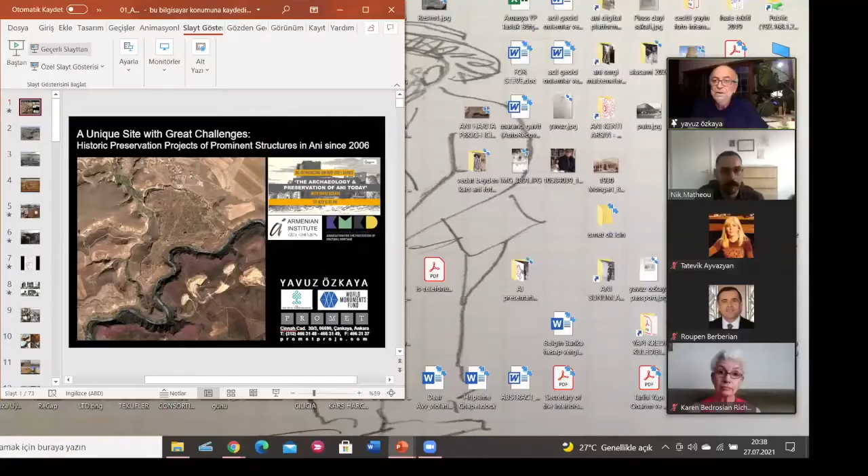Okay, thank you very much, Nick, and the Armenian Institute for this great initiative, starting a long-term planning and opening up space for future collaboration centered around Ani by the scholars, experts, organizations, and individuals from different geographies, different countries. And thank you everyone who are following this series of talks and contributing to the current research presented by dear Nick, Christina, and Hegner, and for being here today while I'll be presenting historic preservation efforts in Ani for the past 15 years now.

It's a pleasure for me to share a summary of these projects and my personal journey in Ani. I will briefly introduce the site and the first preservation projects from 2006 to 2008, managed by the Ministry of Culture and Tourism. Then I will focus on two current projects at Ani, which are being realized through a collaboration between the Ministry of Culture and Tourism and the World Monuments Fund since 2011. In the last part of my presentation, I will take you to a not well-known side of our work on Ani, namely the emerging research, collaborations, alongside the friendships that flourished between experts, parallel to preservation efforts in Ani, and mainly initiated and supported by Osman Kavala.

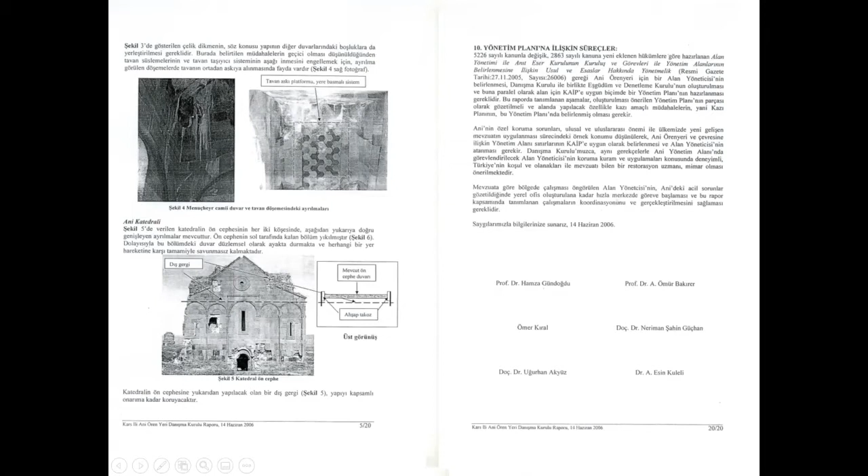The projects I am presenting today are being discussed with the board, including the findings, proposals, and all details of interventions before implementations. In 2008, I continued with two other significant monuments, the Church of the Redeemer, or Surp Prkich Church, and the Church of St. Gregory, or Abughamrents. The tender included the investigation and analysis of the problems, mostly structural, of the Baron's Palace, or Sarai, resulting from extreme walling up during the 1999 reconstruction.

These are among the handful of monuments at Ani that still have most of their original features intact, including their walls, ceilings, floor, and roof tiles, all of which nonetheless are exposed to the elements. Although they are still standing, yet in a compromised state due to the centuries of neglect, a comprehensive survey, research, and stabilization program could help to prevent any further partial or full collapse of this fragile archaeology.

I would love to go into every single detail of these projects, but due to the time frame, I will limit myself to highlighting the major challenges we and these monuments faced, present major proposals to solve the main problems, and I will reserve time to focus on the conservation projects of the Cathedral of Ani and the Surp Prkich Church.

The first challenge. When we started the Ani projects, we also started to search the emerging technologies, now widely used, but quite new at that time, namely high-definition digital survey or laser scanning survey. In reality, we had only 3 months for each monument for a careful survey, documenting, preparing measured drawings, doing historical research, analysis of the construction materials, geological survey, structural analysis, and coming up with proposals for works.

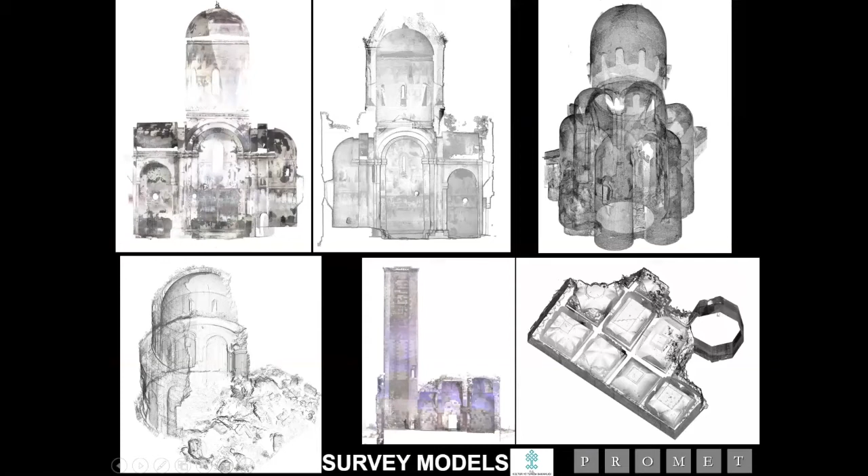Although we did not receive proper or satisfactory answers to our questioning of these new tools and softwares, we decided to learn by experience. And it turned out the right decision. We both saved the survey time, and it gave us the chance to utilize the scan data composed of millions of points with high accuracy to produce 3D models and architectural drawings.

The second challenge we faced was when we tried to understand various construction phases that existed in these monuments, such as the underground chambers at Manuchihr or inaccessible upper-level vaulted side chambers at Tigran Honents. We could see various construction layers, but it wasn't easy to see the whole picture, so we needed more. We kind of started from the very beginning, from scratch.

Myself and my colleague and dear friend, art and architecture historian, archaeologist, and Byzantinist, Dr. Veronica Kalas. I'm happy seeing her among the audience here today, and we still collaborate in other projects. We did all the historical survey, searched in the libraries, ordered books, exchanged ideas with the specialists in medieval Armenian architecture, such as Christina Maranci. That was the first time I heard of Christina. Later, we met personally in 2011 during a workshop on Ani organized by Koç University and Anadolu Kültür of Osman Kavala.

To understand, for instance, why and when the Bema floors were raised in Tigran Honents, or why the Mosque of Manuchihr did not have the proper orientation, or when the interior walls of Tigran Honents were plastered and painted. And we presented our findings on 2 separate occasions in 2008.

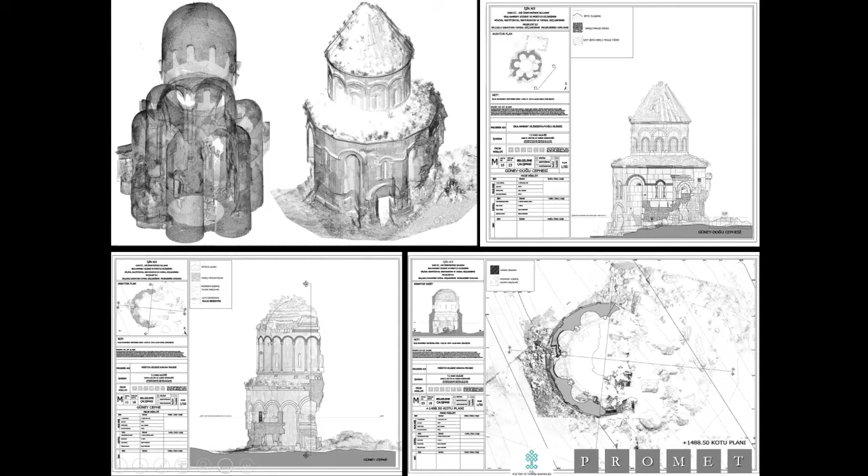And the third challenge was, according to the regulations and traditions in Turkey, a phased approach in historic preservation based on the needs of the monuments did not exist at that time. A major problem, especially in archaeological sites with so many layers like in Ani. We could overcome this tradition with the help of the advisory board of Ani and developed a conservation program to be realized in consecutive phases. The proposed program for Ani monuments comes in 3 major planned phases.

The first phase can be labeled as the urgent or necessary minimum interventions to stop the ongoing disintegration or decay, such as the stabilization of weakened sections of the walls, stitching major detachments, lime mortar injections, besides making the roofs functional and introducing protective shelters.

And as a principle, all these interventions will be reversible, easily detectable, not bringing additional loss or leading to new problems, and keeping in mind that interventions such as the shelter roofs will become the new image of these monuments, most care is given to design as well. First phase works are provisioned to be started as soon as the site is secure and the inventory study of the architectural fragments, both inside and outside of the monuments, is complete.

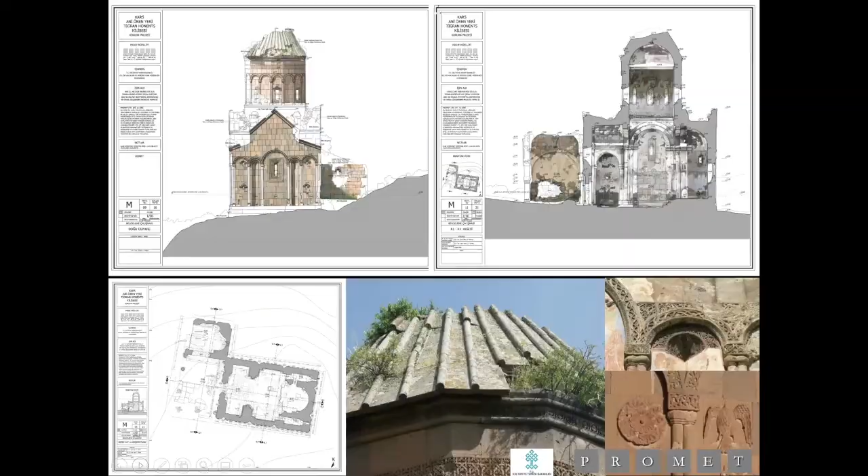The church is in the well-known basilical type with a domed hall. Barrel-vaulted cross arms on the interior are elevated with pitched roofs on the exterior, and all the roofs are capped by stone tiles. The delicate stone decoration on the facades, and the fully painted interior with scenes from the life of Christ, together with an unusual cycle of the life of Saint Gregory the Illuminator, and a scene on the west section of the church is exceptional.

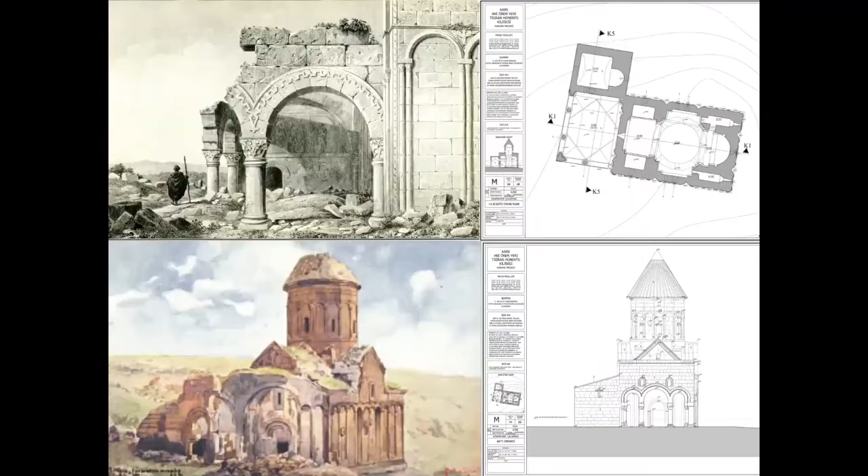The northwest corner of the church attached to the southeast corner of a small pre-existing chapel with a barrel-vaulted crypt underneath is difficult to date. A gavit, or rectangular vaulted antechamber, which is classified as the gallery type, was added later to interconnect the two structures, thereby creating a complex of chapel, church, and gavit. The chapel and the gavit were the most structurally unstable parts of the complex, and the frescoes that were originally protected inside the gavit and the chapel were now entirely exposed to the elements.

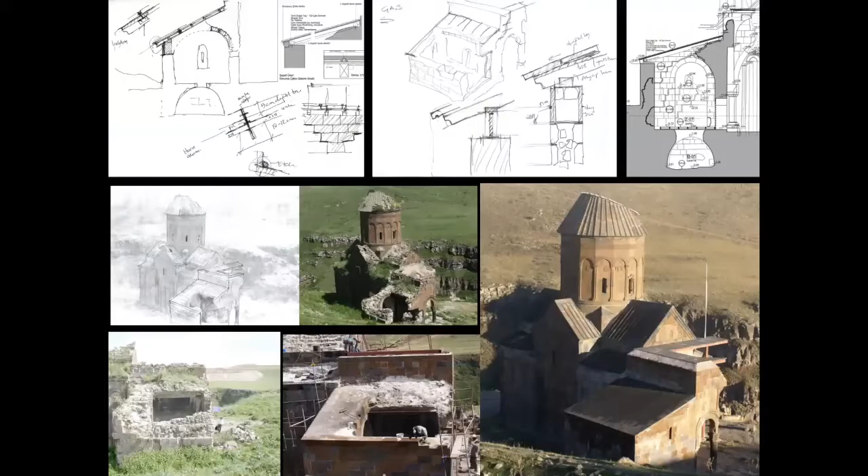As proposals, to document original details of the pitched roofs, we proposed to complete them in the original details, unlike the conical cap of the dome, where we introduced a shelter roof and no reconstructions. Besides, we designed a partial roof, a canopy, for the west end of the church to protect the exposed wall panes, which was modeled to imply the design of the original ceiling of the gavit. And another one over the chapel, again with the same concern. These shelter roofs are designed with steel beams, finished with natural tuff stone tiles. The roofs are the first to be seen while approaching from the main plateau.

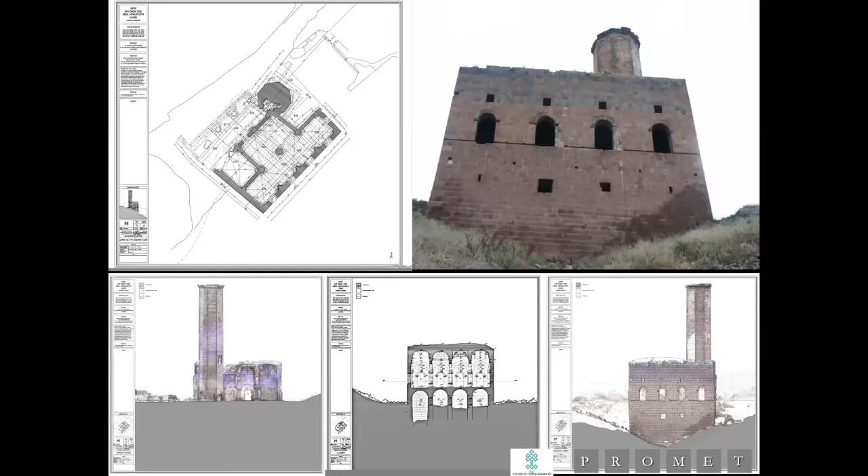The rectangular building, known as the Mosque of Manuchihr, stands on the original 10th century city walls of Ashot and is located just inside the main gate into the old city before the city's expansion under Smbat. The building is believed to have been the first mosque built in Anatolia, constructed by the first Shaddadid Emir, Manuchihr. Divided into square bays, symmetrically laid out but irregularly shaped on account of pre-existing structures, the main level is created by extending one bay off the Ashot walls towards Arpachai, thus creating underground vaulted chambers. Their function remains unknown.

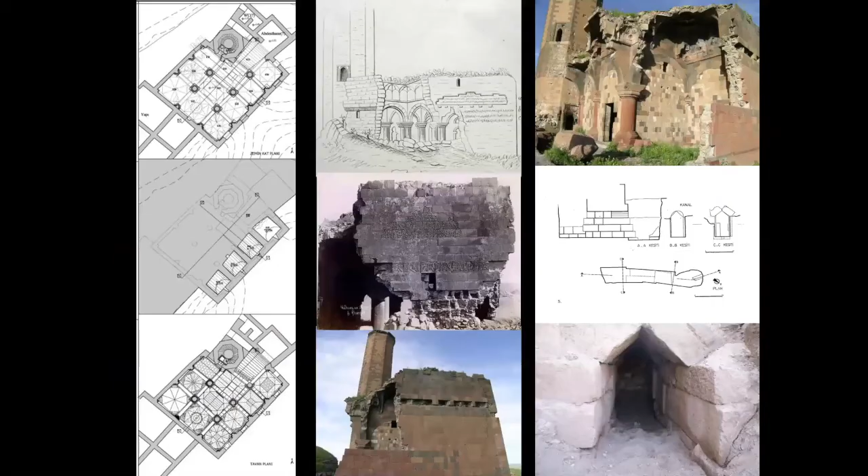Last year, new retaining walls and a door on the southeast facade connected to these underground chambers were exposed. They might have been part of an underground system. Previous excavations also demonstrated there were other buildings: one attached to the southeast wall of the mosque, a now missing ablution fountain and toilets on the northeast wall, besides the main drainage of the city. In 1904, a museum was formed in the Mosque of Manuchihr, where all the objects found during the excavations started to be collected, catalogued, and exhibited. In order to adapt the building to a museum, the arched openings were filled with walls and new windows were placed.

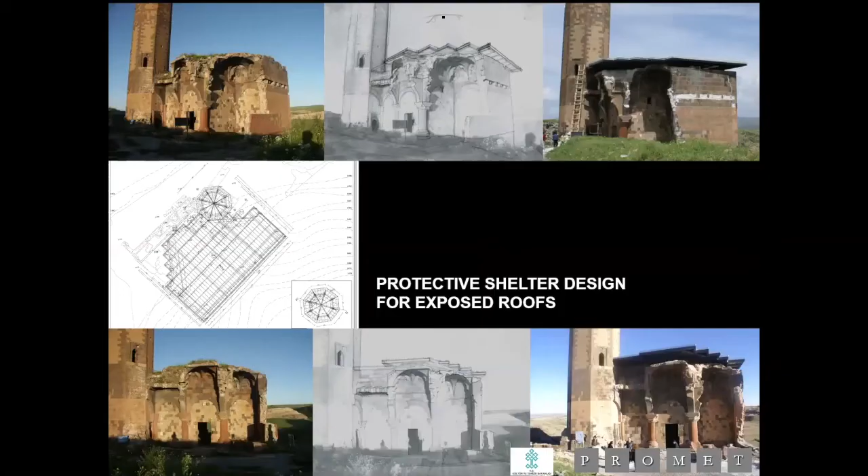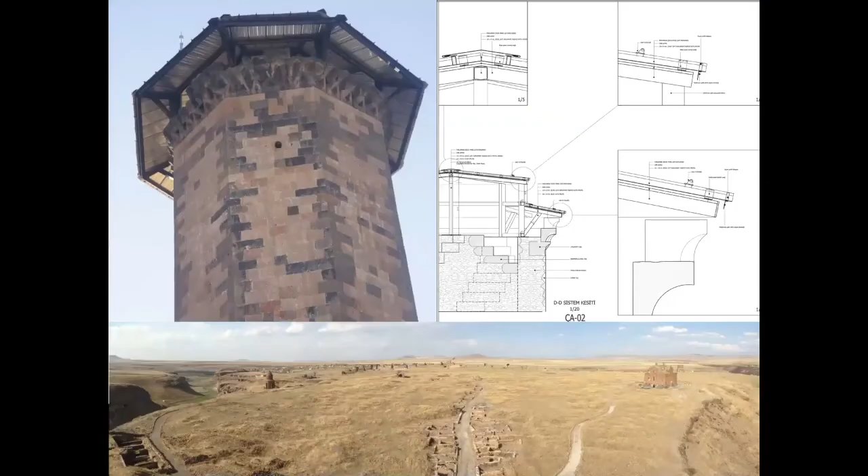Because of its location, orientation, and manner of construction, it appears not to have functioned originally as a mosque. A very complex structure with lots of construction layers and unknowns, yet a very spacious and elaborate building with its thick red columns and decorated ceilings, it has the best view in town. The major intervention proposed for the first phase is a custom-designed light frame shelter, almost flat for minimum visibility, elevated over the exposed roofs, finished in stainless steel sheeting, after cleaning, documenting, and consolidating the roof, and monitoring and stabilizing the main crack, which runs through the ceiling and threatens to detach the main facade overlooking the river. And another shelter at the top of the minaret was designed both to protect its exposed roof and allow visitors a safe spot to view the city.

It's our hope these shelters will help to prevent further damage to the building, as well as preserve the beautiful polychrome tiles and muqarnas that decorate the ceiling. And the white coloring, an effect of Marr's repairs done with cement over the roof when he converted the building into a museum, will eventually be cleaned in the following phases. The Church of the Redeemer, or Surp Prkich, and the Church of St. Gregory, or Abughamrents, both from the 11th century Pahlavuni rule of Ani, came with the same tender in 2008.

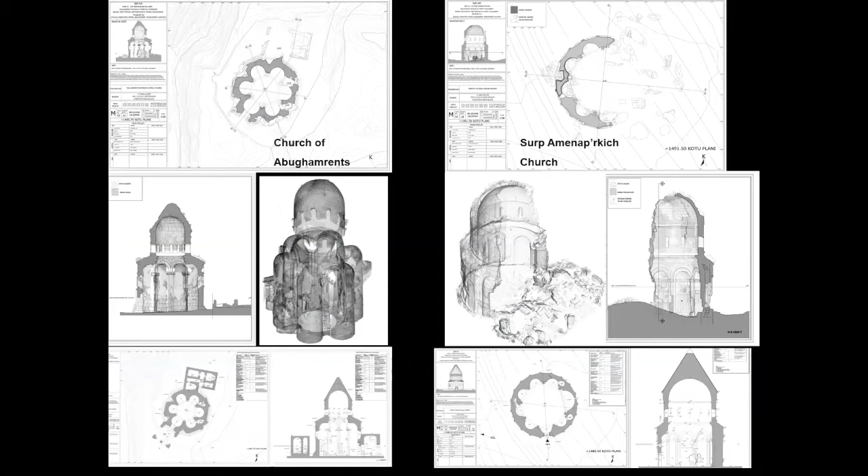Although different in scale and facade treatments, they resemble in planning, being designed as a rotunda: Prkich as an octofoil and Abughamrents a sexfoil in plan. Both had a single entrance facing somehow the south, and both had a porch in the front. Yet, they ended up in different states of conservation.

In 1957, Prkich was left without the essential help to keep it surviving. Abughamrents, on the other hand, could stand at least for another century without much intervention. As expected, these two come with different stabilization programs to be realized again in three main stages.

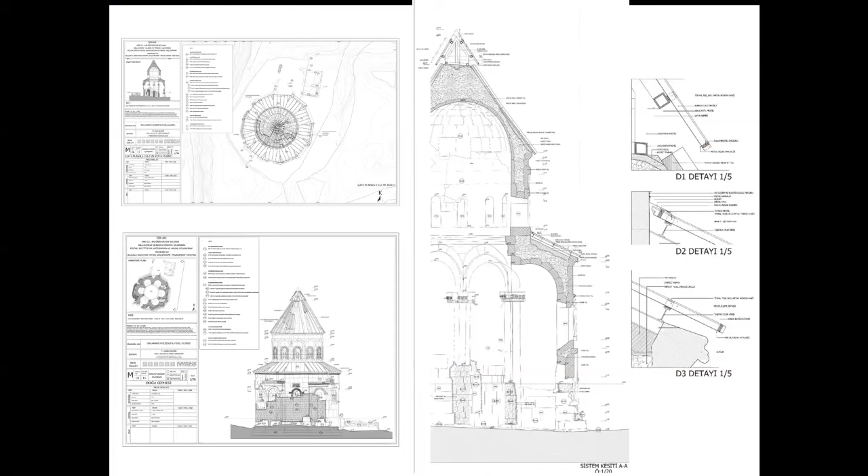Besides stabilizing the weakened sections of the load-bearing walls and rehabilitation of the stone tiles of the conical dome, in Abughamrents we proposed not to reconstruct the conical top, but introduced a shelter in conical form made of artificial stone, which looked like tuff, and we have also proposed another one with the same materials for the lower level roof, as we couldn't document any original roof tiles at this level as well.

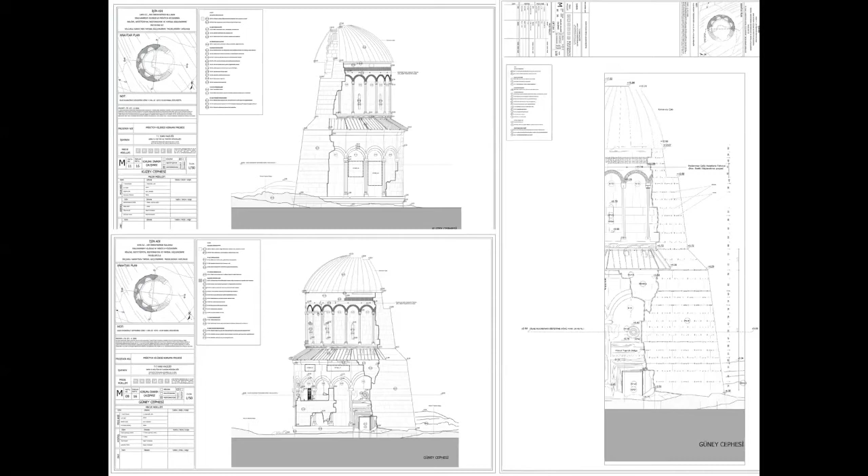For Prkich, on the other hand, we had to face a challenging problem: how to keep the existing half with minimum intervention, how to keep it surviving in a safe and elegant way. Initial design introduces all natural tuff stone buttresses to counterbalance the existing half, besides other stabilization measures like stitching, injections, shelters over the exposed roofs, and an inventory program of the fallen fragments at the eastern section of the church to be evaluated within the larger context of the project. You will see the details of these studies in the course of the presentation just after the cathedral, which is next.

Ani was at the peak of its development under the rule of the Armenian Bagratuni Kingdom when King Smbat ordered the construction of the Cathedral of Ani in 989 to Trdat, the great architect of the time. Dedicated to Surp Asdvadzadzin, the cathedral was completed by Queen Katranide, wife of King Gagik, in 1001. The chosen territory for the construction of the largest church in Ani was located on the high slope between the citadel and the north walls, visible from all directions, one of the predominant buildings of the city landscape.

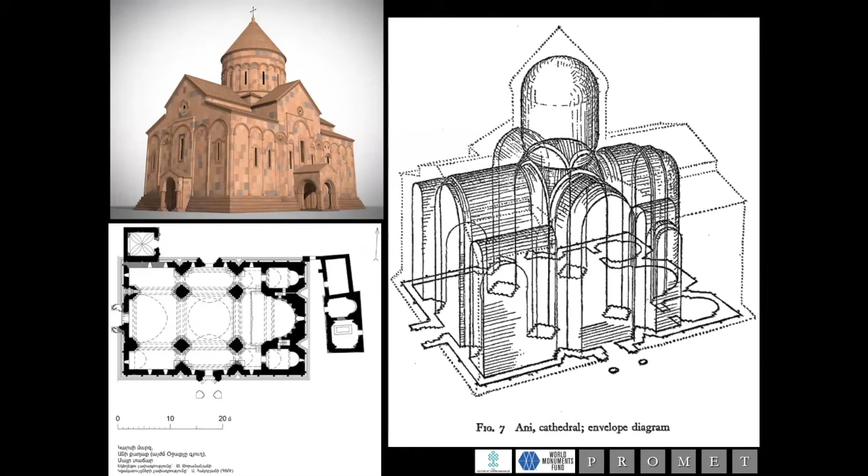The cathedral is a three-aisled basilica in plan with a central dome supported by four massive freestanding columns which carried the collapsed dome. The main apse is flanked by two-story high vaulted chapels. The monolithic and symmetrical mass of pure geometric forms on the outside turns into a rather dynamic space created with vaults, arches, squinches, and a dome in the interior.

There are three semicircular arched entrance doors on the west, north, and south. According to Jean-Michel Thierry, traditionally the one on the west was reserved for the people, the north for the patriarch, and the south for the king. Each entrance door had a small porch in the front attached to the cathedral walls. The possibility of a gavit on the west is most discussed by Toros Toramanian.

Stone decoration over the window frames and on the squinches over the V-shaped niches and the capitals of engaged colonnades of the facades are masterpieces, together with the massive clustered columns which rise up to support the ceilings and the dome, and still lure the visitors as they did in the past.

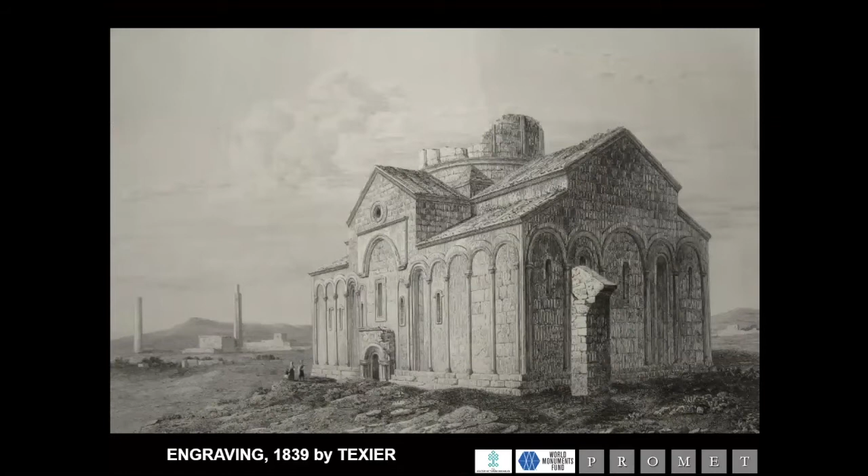The cathedral, which was temporarily used as a mosque after the conquest of Ani by Alparslan in 1064, was restored during the rule of the Zakarians in the 13th century. In 1319, during the disastrous earthquake, its nearly 20 meters high dome collapsed. Standing exposed to elements and various earthquakes for more than 6 centuries, the northwest corner of the cathedral was seriously damaged in the 1988 earthquake. The southwest section of the cathedral is currently under the threat of a total collapse.

Ani archaeological site was listed on the World Monuments Watch in 1996, and some preliminary studies have been conducted for the stabilization of the west wall of the cathedral. The Turkish Ministry of Culture signed a memorandum of understanding with the World Monuments Fund in 2010 for the preservation of the Cathedral of Ani and Surp Prkich Church. In 2012, the cathedral was scientifically surveyed and documented, and a historic preservation project was proposed. Here is the realization of the project.

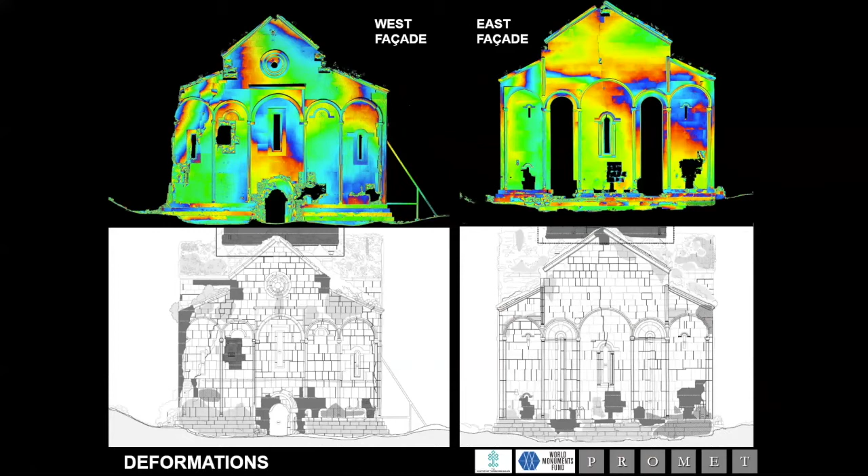Survey tools that I showed in the beginning and the software became more advanced since 2006. This survey lasted only 1.5 days at the site, compared to 8 days for 2 monuments in 2006, and was more precise. The next day, we could receive the deformation maps over the facades, a new gift of the advanced laser technology. Here are a few survey drawings to be further utilized in the next phases of the project.

Many representations of the cathedral came with a conical roof without a concrete knowledge of its details. Although it is true it had one, no historical visual evidence existed. All we knew is it collapsed in 1319, and the remains of it were documented during the campaign by Marr in 1908.

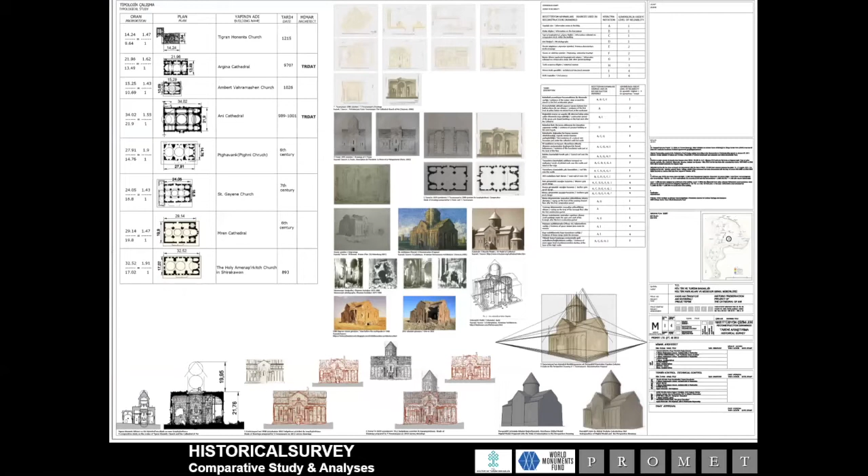Although we surveyed and documented the window openings and the colonnades at the base of the drum wall, we had no evidence for the height, details of the conical roof over the dome, architectural features of window openings, stone decoration, and so on. All we had: survey data, typological studies, comparative analysis, and some previous reconstruction drawings developed by architects Toramanian and Charles Texier, which helped us in our analysis within the scope of our research.

Among these studies, luckily, I came across a bit of information by Jean-Michel Thierry, who mentioned a stone sculpture depicting the cathedral was found around the 1980s, and it is kept in the Kars Museum. After checking this information with the museum, finally, we could reach it and compare the proportions of the model with our survey drawings. Now, at least, a more solid or tangible evidence we could utilize in our reconstruction analysis.

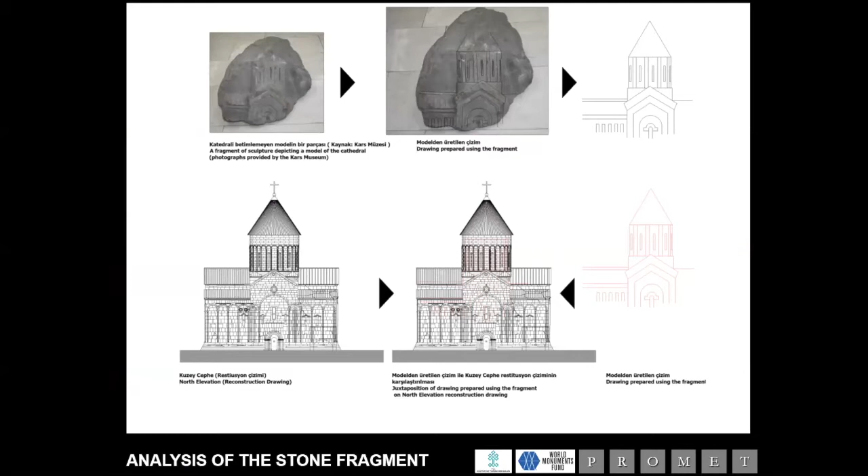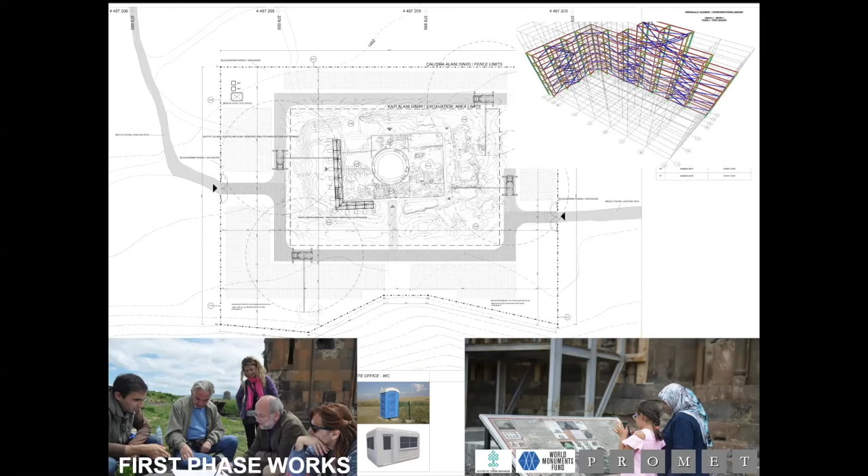Again, the conservation program comes in 3 planned phases. The first phase, after the installation of a fence for the security and safety of the visitors, yet allowing them inside via the main gate of the cathedral in a controlled way, erection of a temporary load-bearing scaffolding along the west and partially the south wall to hold the detached walls, and a protective load-bearing wooden scaffolding inside the cathedral as a precaution for collapses.

Excavation and cataloging of the fragments, launching a structural health monitoring program, and the clearing, cataloging, and completion of temporary emergency measures on the roofs have been planned for the first phase.

Second phase is all about the stabilization program. After the evaluation of the data obtained in the first phase, the emergency structural stabilization works, such as the reconstruction of the northwest section of the church, stitching of the detachments, lime mortar injections, repairs, and completion of missing facings of the walls, roof, and floor tiles have been planned at this phase. Hopefully, the second phase will be launched this year.

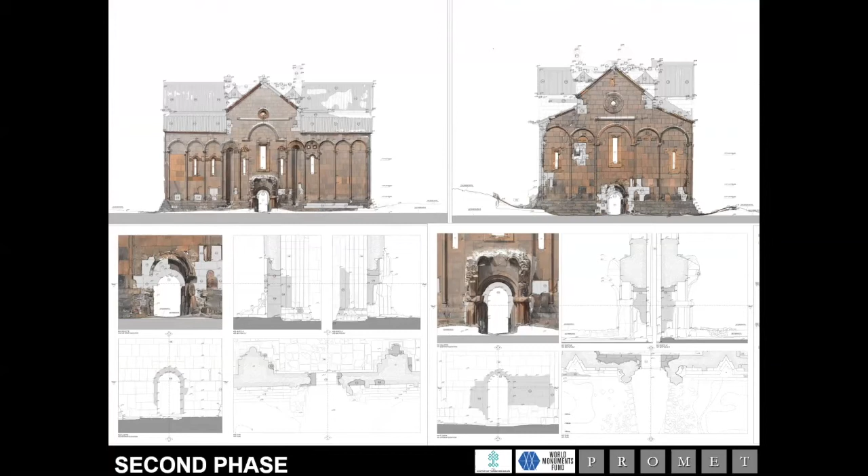And phase 3 is about the most discussed proposal, the design of a protective shelter over the dome opening, an outcome of the missing roof. Although there is a need of a protective shelter as the monument suffers being exposed to harsh winters and effects of snow, rain, and wind, its form and details were equally important, for once it is constructed, that will be the new image of the cathedral.

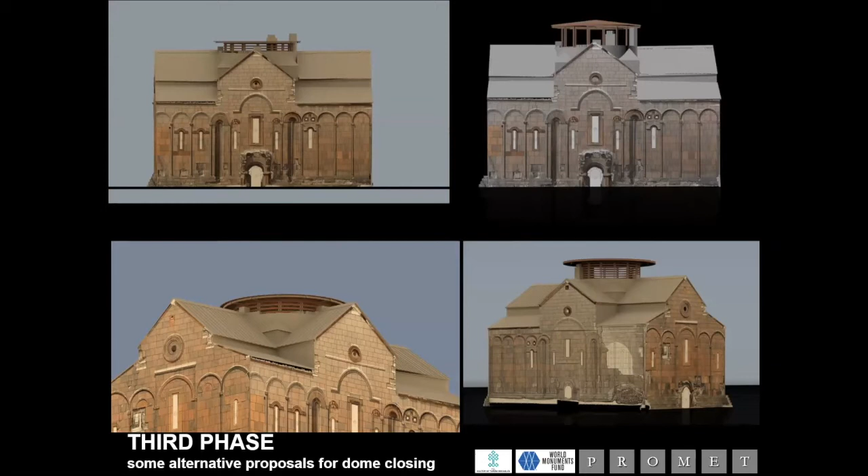Our initial proposal of the protective shelter is designed in the original conical form, not a reconstruction in the real sense. It is made of artificial stone cladding, which looks like natural tuff stone on the outside, and carried by a steel structure visible only from the interior. This design will be further elaborated with the help of new findings, further analysis, and data evaluation within the site management plan of Ani in the future.

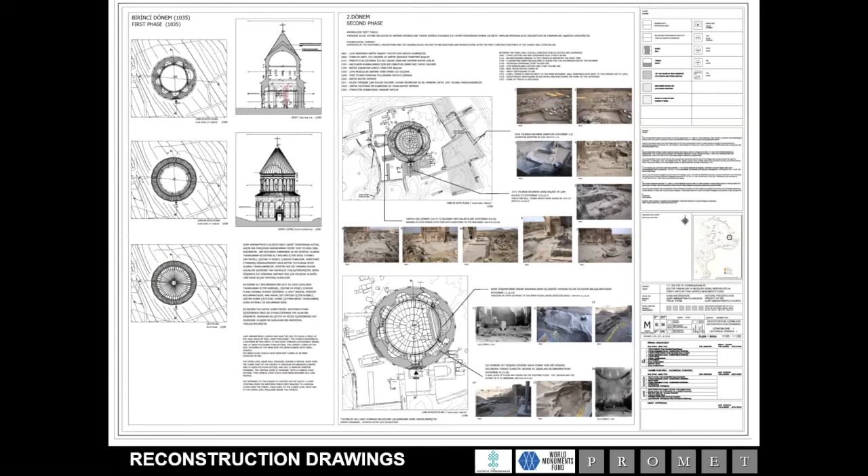A jamatun was added in 1193 for the accommodation of the pilgrims, and a bell tower was erected in 1271 before the main entrance. Earthquake damage to the church is first recorded in 1131. Its dome was restored in 1342, probably due to the damage of the disastrous earthquake of 1319.

When Nikolai Marr and his team were working at Ani, the church was still standing, but was in a very unstable condition. Marr's efforts to stabilize the walls of the church in 1912 to prevent a total collapse could not save the eastern half of the church, which fell down completely in 1957. A continuous detachment line crack on the south wall, visible in old photographs, is the boundary of this collapse.

Marr's stabilization, done with smaller size masonry in a darker color than the originals, can be easily seen today, both from the old photographs and remaining on the existing west wall today. The technique employed in walling up for stabilization turned out not so successful, due to weak joints, an outcome of flat mesh cut stones, and a weak cement mortar with a lot of cavities.

Prkich lost its architectural and structural integrity together with this collapse. The remaining western half survived up to date with the scars of the 1988 earthquake, but in a much compromised state. After 1996, Ani was listed in the World Monuments Fund's watch list during a mission initiated by the Historical Heritage Protection Foundation in 1998. The main door was filled with rubble stone to prevent any further collapses, besides strengthening the weakened sections of the west wall.

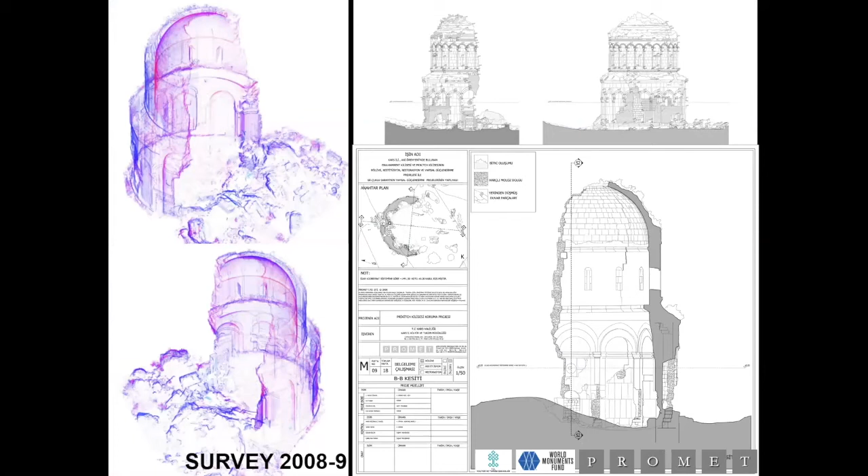In 2008, the church was scientifically documented for the first time, and a historic preservation project was prepared, which I showed earlier.

After World Monuments Fund signed a memorandum of understanding with the Turkish Ministry of Culture and Tourism for the preservation of Prkich in 2010, conservation works began in 2012 with the support of the US Ambassador's Fund for Cultural Preservation.

As expected, the conservation works for Prkich consist of 3 planned phases, yet it comes with a different management plan—more collaborative, very detailed, questioning all options, flexible and independent of the tendering restrictions of Turkey, heavily supervised, informed with advanced technologies, led and supported by the members of the technical control team, composed of both consultants by World Monuments Fund and experts, preservation architects and engineers from the ministry.

The first phase is, after fencing the site for the safety of the visitors, erection of a protective and load-bearing scaffolding inside the monument for the security of the site team has been provisioned.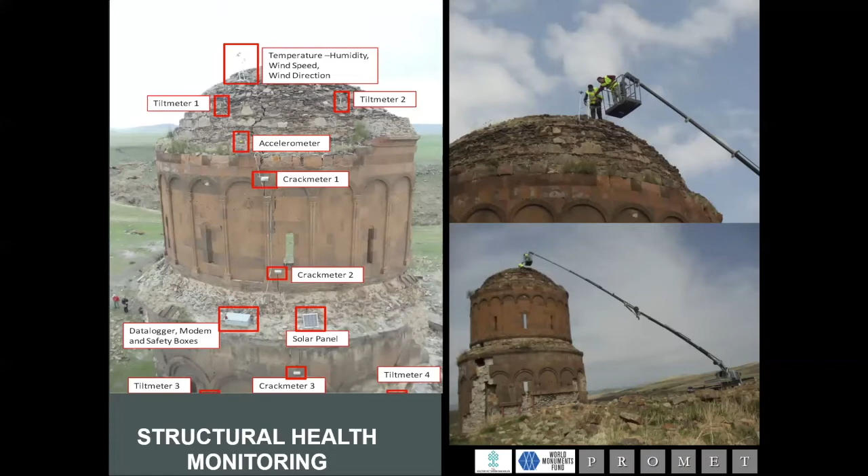It included a sound alert for the safety of the workers, to warn them to evacuate in case of any seismic activities during the clearing inside the church.

A fence was designed on precast footings to limit the site for visitors, and signboards were installed to inform the visitors both of the story of the church and the ongoing works.

Following this, the workers started to move fallen fragments of the eastern section of the church with the help of a crane and clear the rubble to expose the existing floor level before erecting a steel scaffolding inside the church.

The large fragments, ranging from 4 to 12 tons each, were carefully lifted, documented, and relocated around the church on wooden blocks for further documentation.

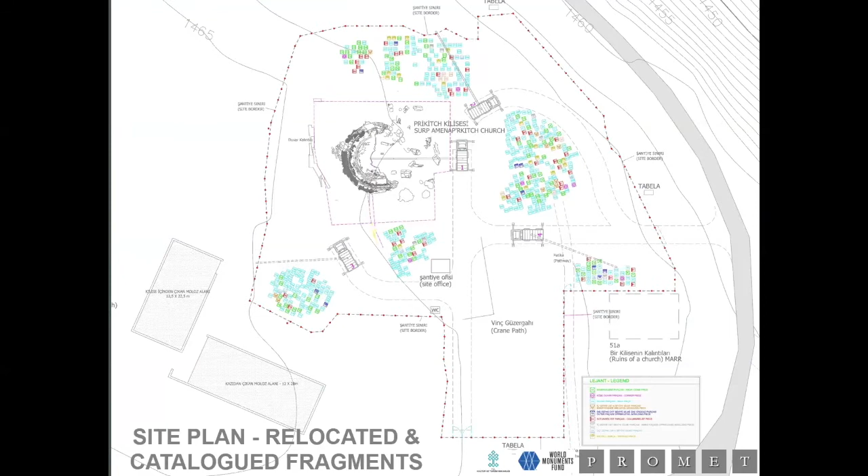Works for clearing the fallen section of the church continued, and the progress was documented on a daily basis, continuing until the original stone floor tiles were exposed and documented, before the erection of the prefabricated steel scaffold.

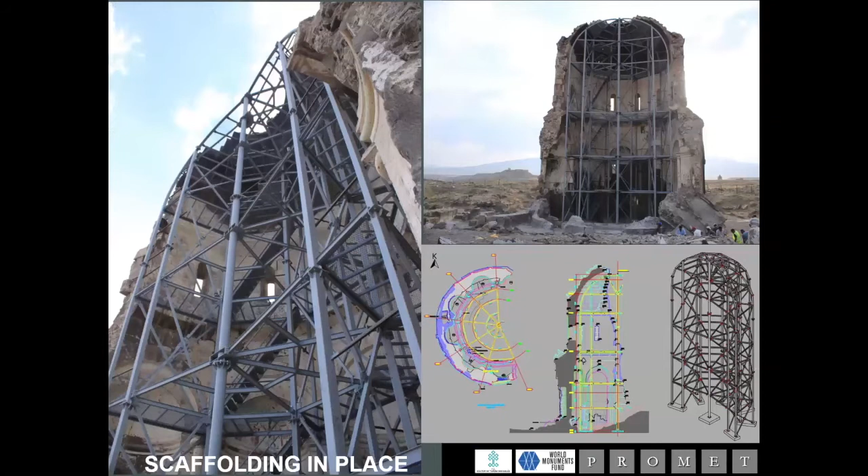Designed and manufactured in Ankara, the scaffolding was assembled on precast footings, and the excavation works started in collaboration with Kars Museum. Relocation and cataloging continued.

Numerous small fragments were also collected and classified, such as parts of inscriptions, khachkars, pottery, glass, and alien masonry. By the end of the work season, end of August, over 650 architectural large fragments were relocated and catalogued.

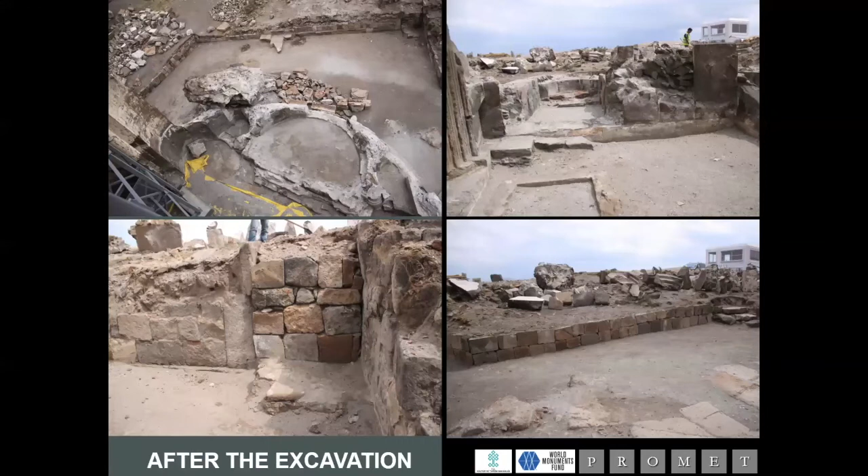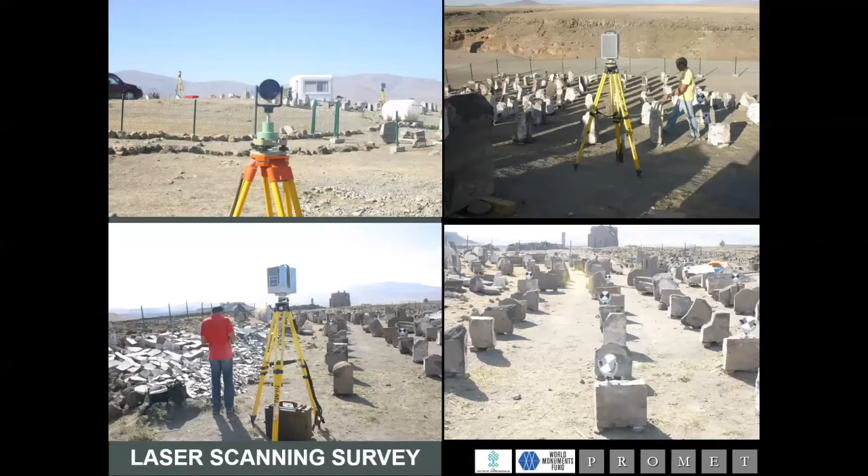For facilitating the 3D laser scanning, these large fragments were relocated and aligned at an interval of 1 meter distance from each other. The church and the fragments were documented again with a laser scanning survey to prepare virtual models of them for further investigations.

In September 2012, the technical control team, including consultants of the World Monuments Fund and experts from the Ministry of Culture and Tourism, held a series of project meetings at the site to discuss the works realized to date, findings after clearing and excavations, winterization strategies for the monuments and fragments since the work season in Kars is limited and winter was advancing, besides discussing plans for the near future.

It was agreed to wait before starting the emergency stabilization works, such as stitching the main crack, repair of loose stones, and repairs on the west wall of the church, until the results of the structural health monitoring program are complete. Yet, the following protective measures were to be realized before winter.

Temporary shelters to protect the fragments against the effects of harsh winter conditions were manufactured at the site. They were planned away from the future excavation zones.

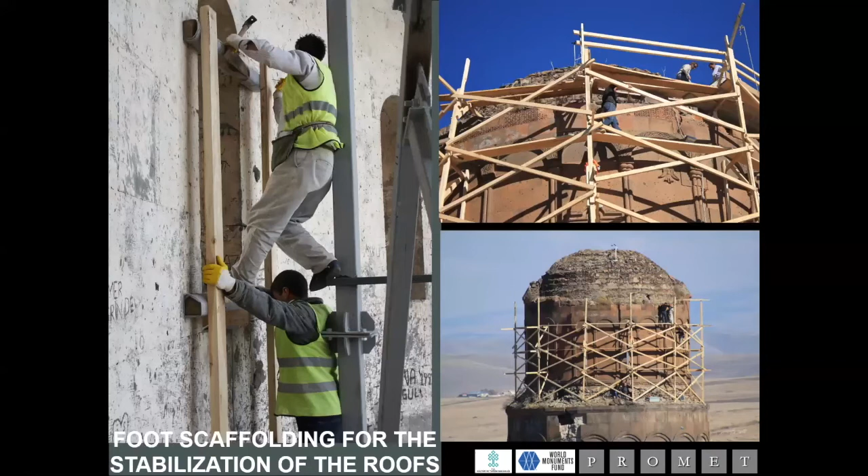To clear the loose mortar and vegetation and to start works over the dome to strengthen the loose masonry, a foot scaffolding manufactured in wood was erected over the lower level roof.

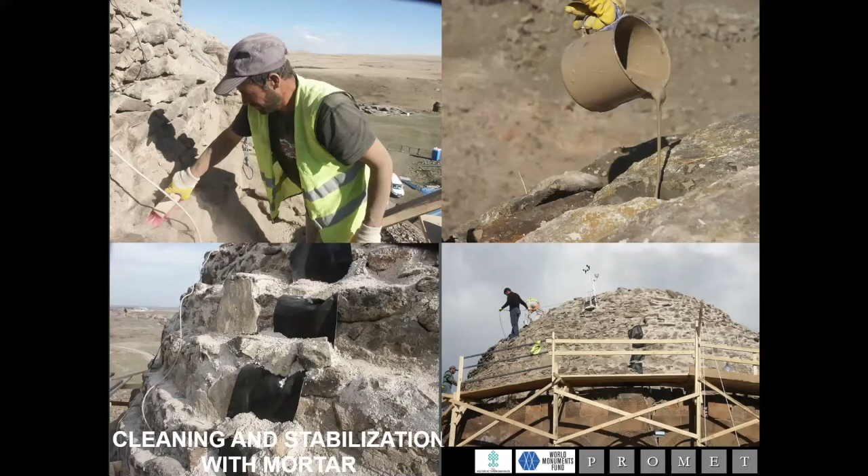Cleaning of the loose mortar, soil, and vegetation on the roofs, and filling the voids with a hydraulic lime mortar mix, was carried out with the utmost care and safety measures. A durable geotextile membrane was laid over the large crack on the dome before applying the mortar to stop the effects of snow and rain.

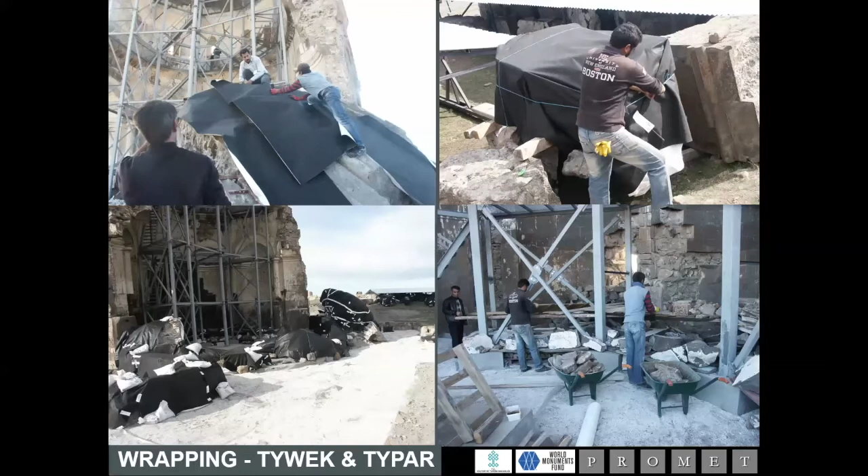All exposed walls, architectural fragments, and exposed floors, including excavated areas, were covered with geotextile membranes. Small fragments were carried close to the west wall inside and placed on shelves. That was the end of the work season.

In the beginning of the next year—sorry, I missed all the dates here, anyway this is after the first season—TCT meetings were held both in Ankara and at the site again for evaluation and future planning.

It was agreed to start the emergency stabilization works at the two critical zones: the west wall and the south wall over the main entrance gate.

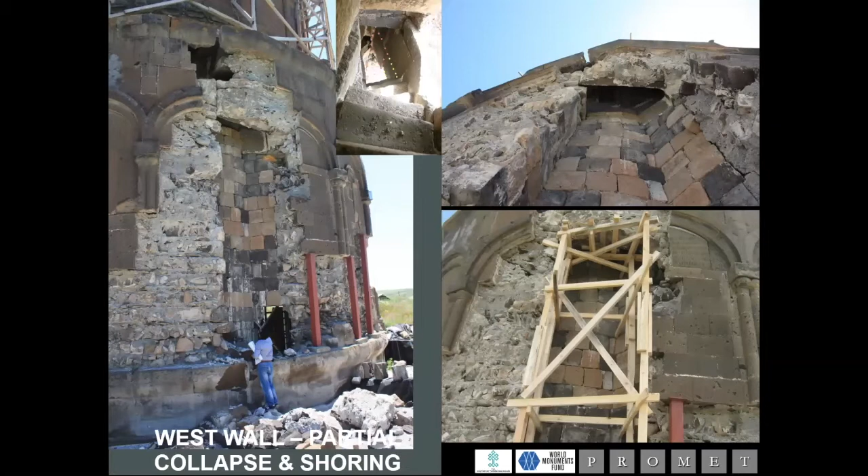A few days after this meeting, our night guard reported that some of the upper level facings of the west wall had fallen down. With email and Skype communications, we agreed on the details of the interventions, including temporary shoring for the west section.

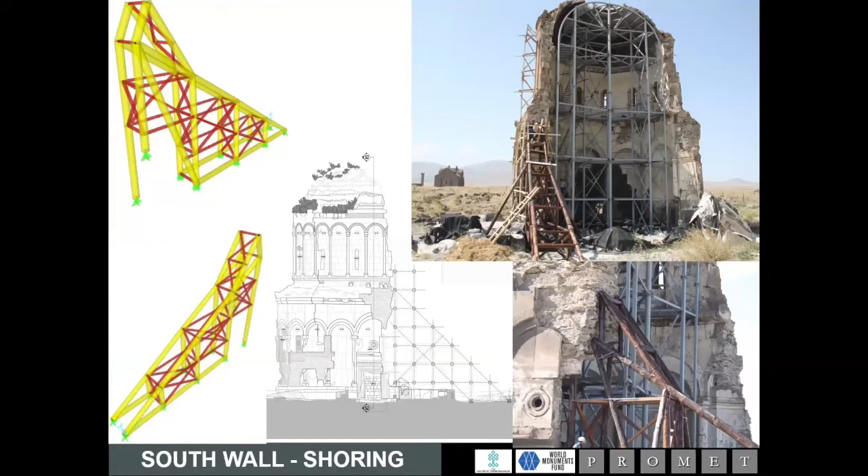A temporary heavy timber structure sourced from Sarıkamış was designed to shore the south wall over the entrance gate of the church, which tends to lean towards the east and was in danger of falling down.

Although we had temporary shoring for the west wall following the partial collapse, a series of problems coexisted, and agreement on the details of the stabilization works with the Turkish team over email communications took some time.

It was finally agreed to shore the interior wall of the staircase up to the pending stones and complete the west wall facings together with lime injections, besides other measures.

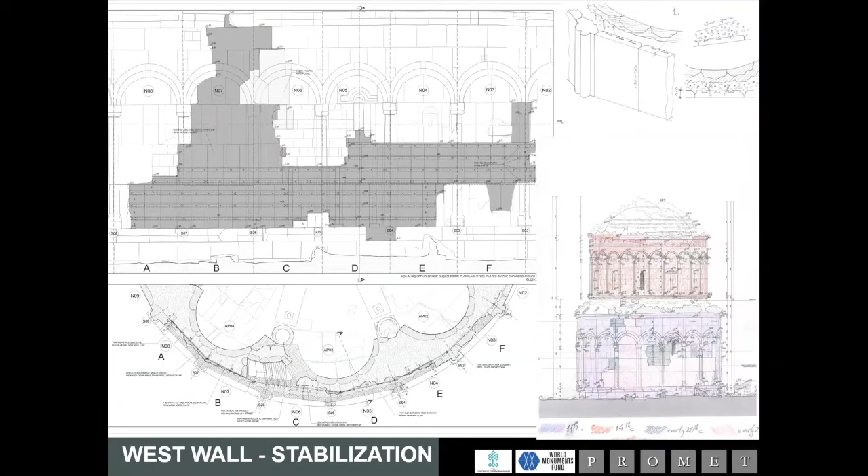Interior wall completion, together with new stainless steel steps modeled after reconstruction drawings of the original steps, and stainless steel banding to strengthen the two attached sections of the west wall, besides other temporary measures, were completed by the end of the summer of that year.

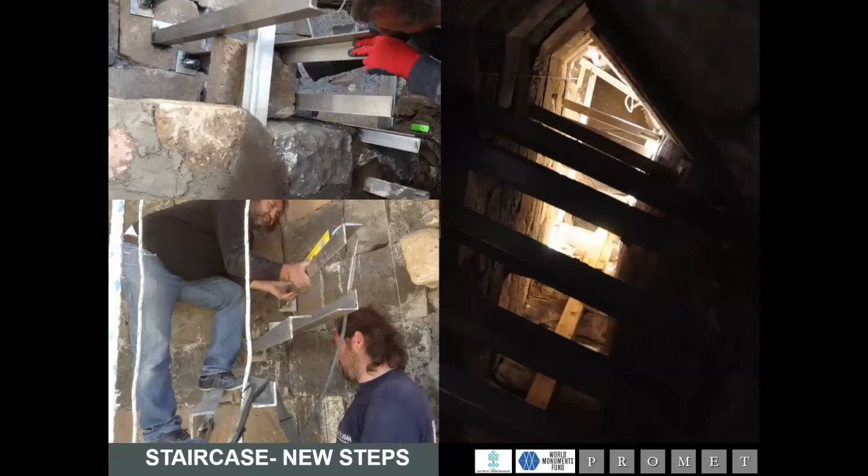Construction materials analysis and wall paint studies were realized in separate missions by experts from the Middle East Technical University in Ankara and from the Central Laboratory of the Ministry in Istanbul. The paint analysis displayed that there were more than one paint layer.

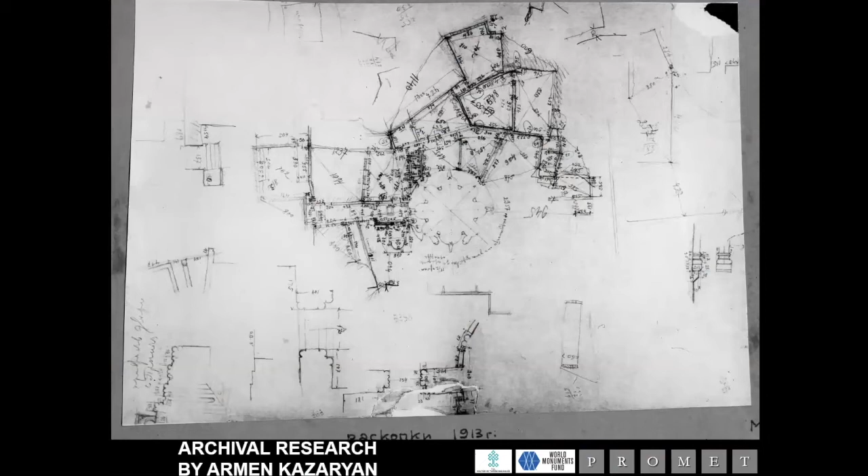An archival research by Armen Kazaryan brought about the extent and findings of the research done during the Marr campaign, and virtual anastylosis studies by Alin Ponteoğlu explored whether some of the fallen fragments could be integrated back into the church walls.

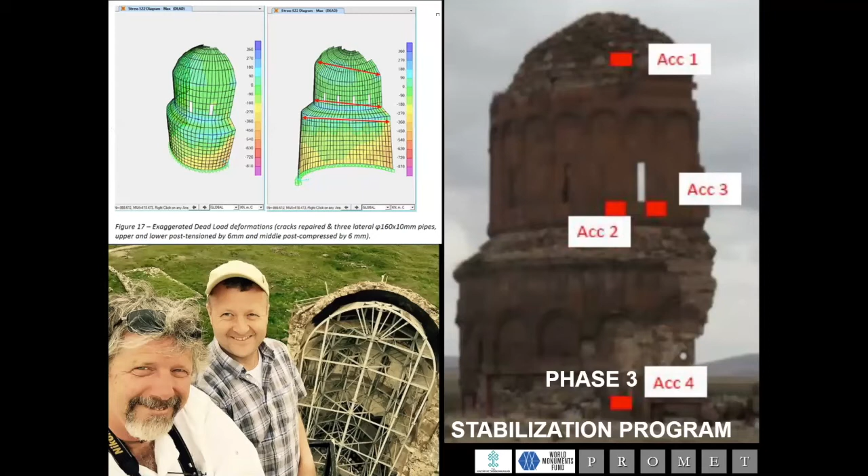In 2015, the technical control team was at the site again to further discuss and plan for the third phase of works, which included completion of the stabilization program, on-site tests for the preservation of the wall paints, and enlarging excavations and presentation of the site for visitors.

After review of the structural health monitoring and further analysis, final proposals by the consultants Steve Kelly and Predrag Gavrilovich, and structural engineers led by Ahmet Türer from Middle East Technical University in Ankara, it was agreed to continue with the extension of the scaffolding up to the dome against any failures and to insert tension rings both around the cupola and the lower level.

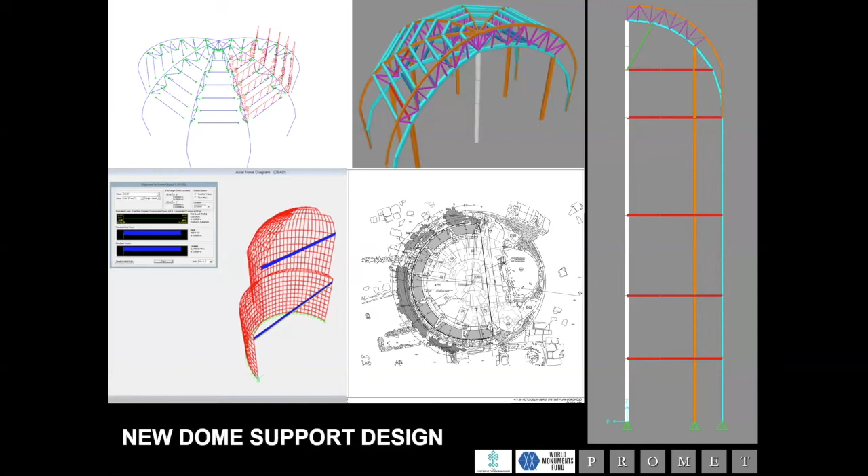And these were realized at the end of 2015. Next, planning now was the completion of the west wall, a part of the stabilization, in the original 11th century size masonry. We started to search the quarries around Ani to find the appropriate stone for the walls.

Some of the quarries were historic quarries. For instance, nearby Tignis, you see on the left-hand side, themselves became objects of preservation. Although we found one away from the historical quarries, we faced a lot of difficulties in sourcing them.

Meanwhile, Armen Kazaryan had advised someone from Yerevan for the west wall completion. Arayik Avetyan, an architect and a very qualified mason and sculptor, came to Ani over communications, inspected the quarries and the facing stones at Pirkic, saw all the difficulties with the quarries here, and advised to source stone from the operating mines in Armenia, which was much easier.

In 2016, I went to Yerevan together with Alin, inspected the samples and their specifications, and with the agreement of the technical control team and the World Monuments Fund, we decided to source them from Armenia.

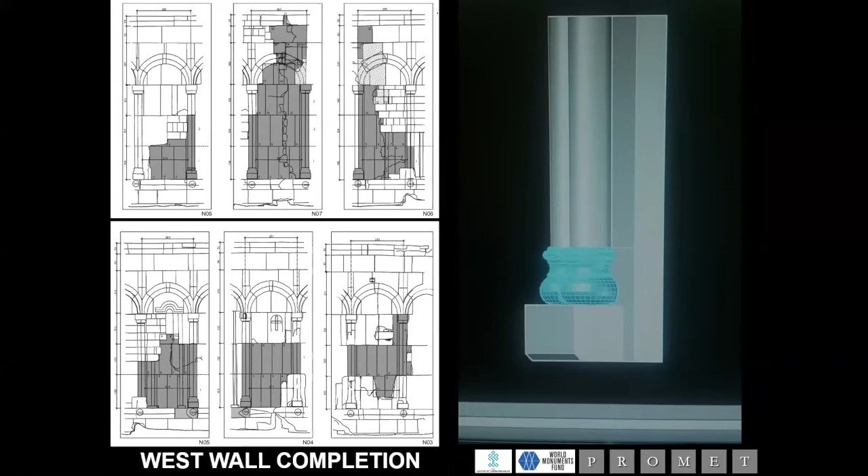As we had the minute detail of each facing stone, we prepared drawings of the new facings, ordered them, and they were cut in desired dimensions. They were all pre-shaped by Arayik nearby Yerevan under the supervision of Luca and her friend, and transported to Ani via Georgia at the end of 2016.

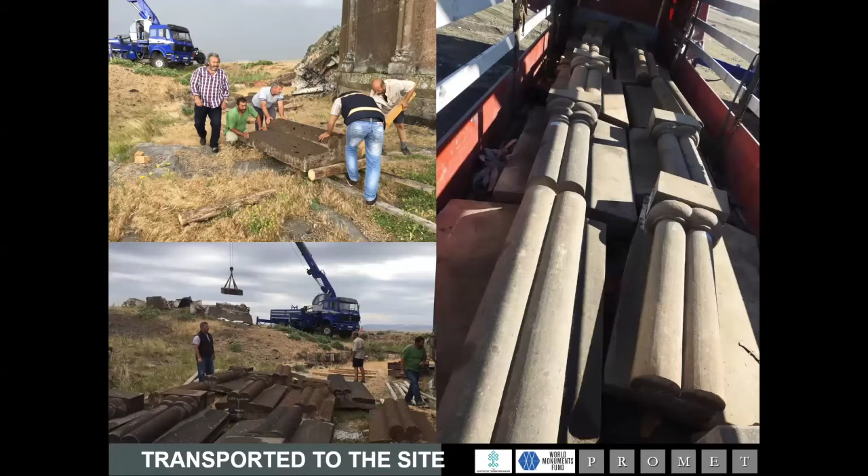In the summer of 2017, the site team, composed of a site engineer from Ankara who also did all the steel works at Pirkic that you've seen before, Ömer Bey, some other qualified workers from Ocaklı village, and Arayik Avetyan, started to lift the pre-shaped blocks to complete the west wall stabilization.

The teamwork turned impressive. While Arayik started to learn some Turkish words for communications, Ömer Bey and the team from Ocaklı also started to understand Armenian words in the following days.

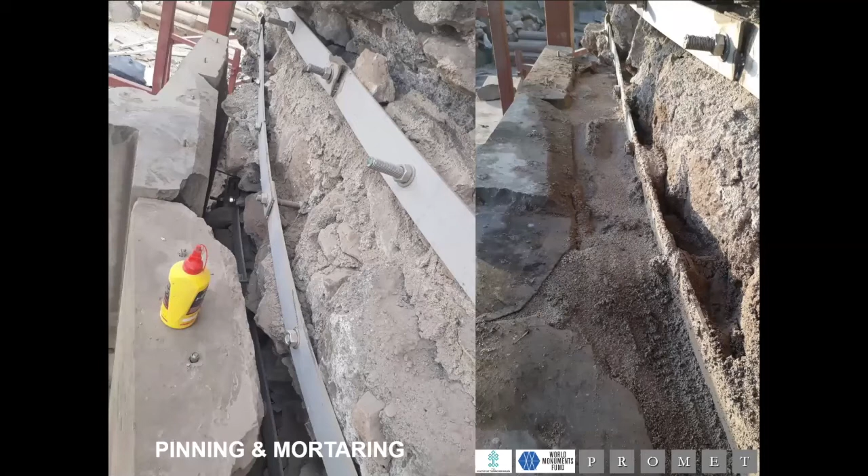A detail showing how new blocks were pinned to the steel bands and lime mortar is applied. While myself and Alin were not at the site all the time, we communicated via WhatsApp for critical decisions to be made, such as having to take off a small portion of the loose facings done in the 1912 stabilization and replace them with new ones. Steve Kelly called this operation demarring.

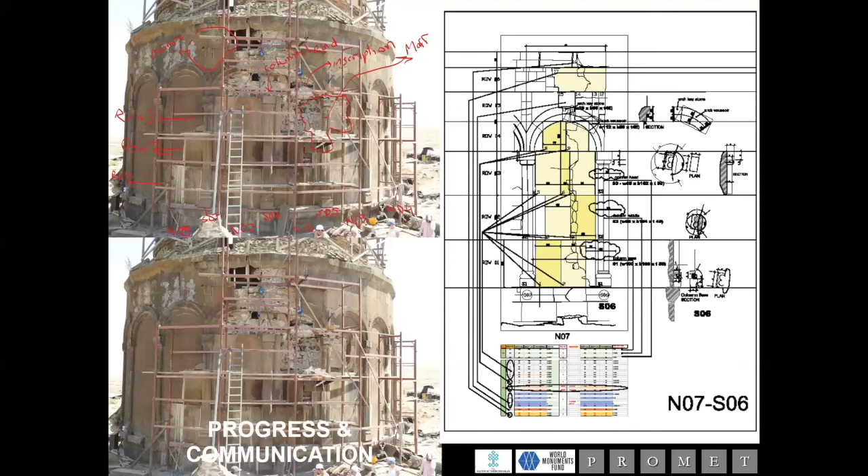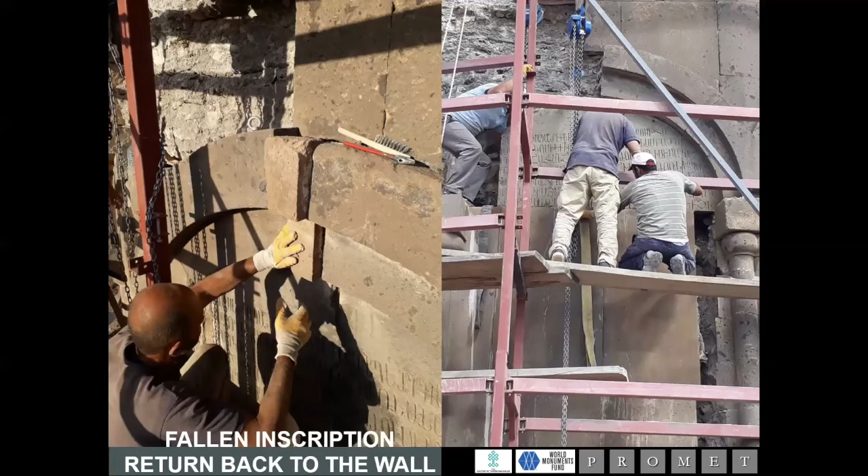Works also included integrating classified fallen fragments back to the wall, such as a keystone of an arch and pieces of colonnades, and the foundation inscription, merging the 11th century wall together with the 21st century one.

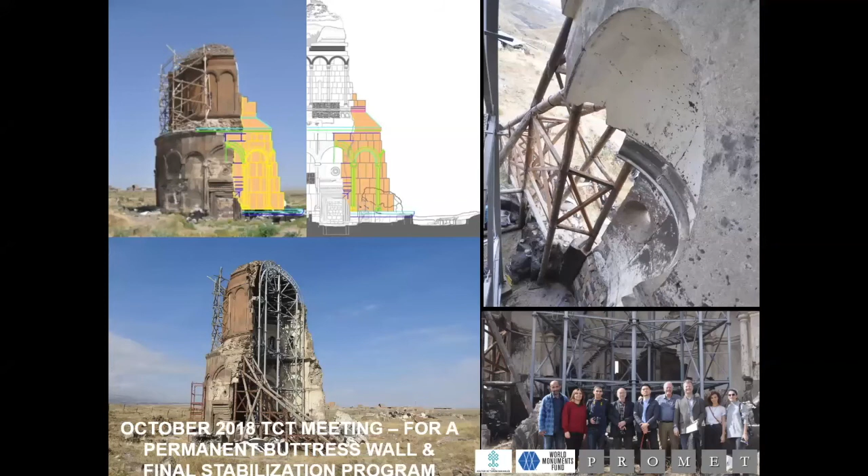The final stabilization program also includes a permanent buttress, again with 11th century features, to replace the temporary wooden scaffolding holding the south section now, besides other measures.

Detailed and ordered again from Armenia, the blocks already arrived at the site and work started last year. The new buttress wall will also integrate parts of the fragments collected and classified earlier.

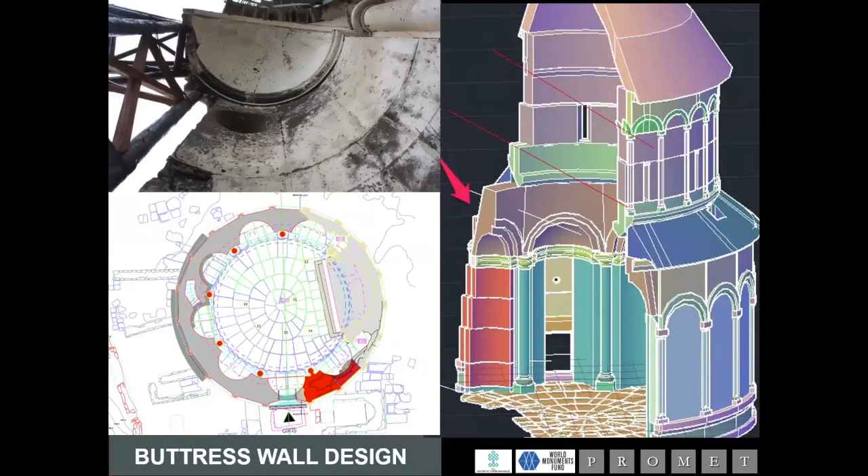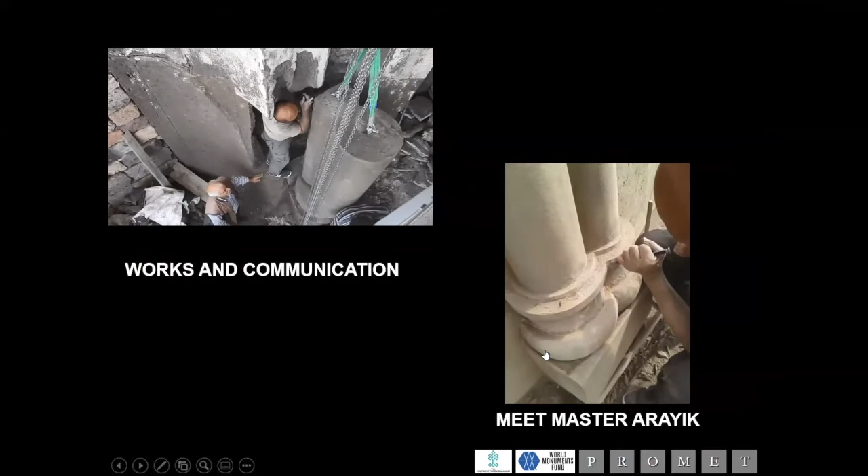Here's a view of the site team doing this very hard work, done in a constricted area inside the church. Okay, that was a long one.

It is my thought that after the masonry work started at Pirkic, villagers also started to pay regular visits to the site, observed and talked among themselves about the masterly work being realized. I believe they began to realize how, with so much master labor and artistic talent, these great monuments were being constructed at Ani. Arayik Usta, meaning Master Arayik, became and remains a legend in Ocaklı.